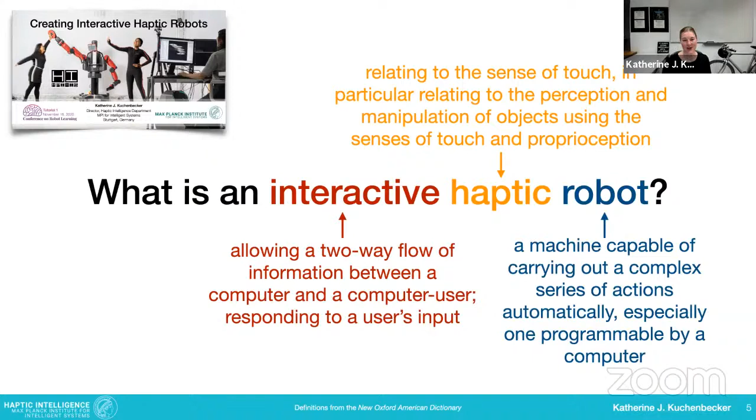Now, to get you motivated, before I try to teach you some of the wisdom that I think might help you create interactive haptic robots, I want to show you some examples, because I know you come from many different fields, especially more learning-focused fields. So just to get you interested, here are four different kinds of haptic robots that my team and I have investigated over the last 18, 20 years.

We'll just go through them in order, showing a few videos for each category. First, in social physical human-robot interaction, the robot is interacting with you like it's another person almost. At the upper left, this is my first PhD student at Penn from the Grasp Lab. He interned at Willow Garage and built this demo, PR2 Props, that lets the PR2 exchange high fives, fist bumps, and fist bump explodes.

And it's doing these by moving through a trajectory and then feeling the contact and reacting. And that tactile reaction was really, really important and amazingly fun.

At the upper right, my now PhD student, then master's thesis student, Alexis Block, turned the PR2 into a hugging machine. And of course, here it is in the default form. Then she made it soft and warm and tactilely reactive. And it can actually give really good hugs. We need more hugs in life these days.

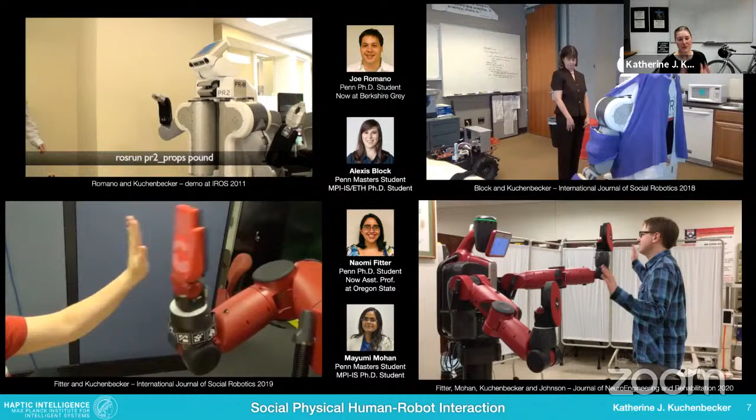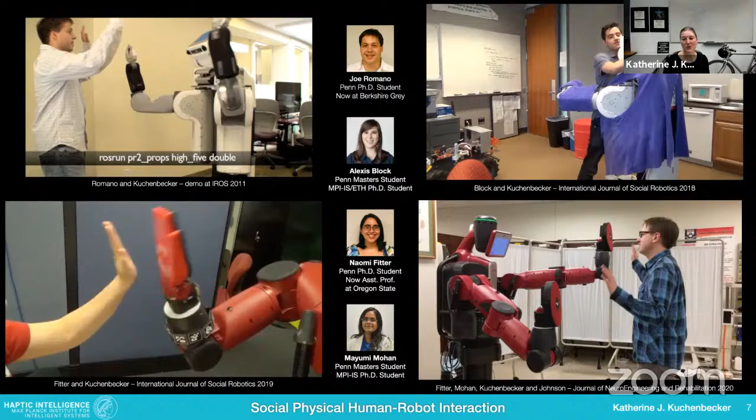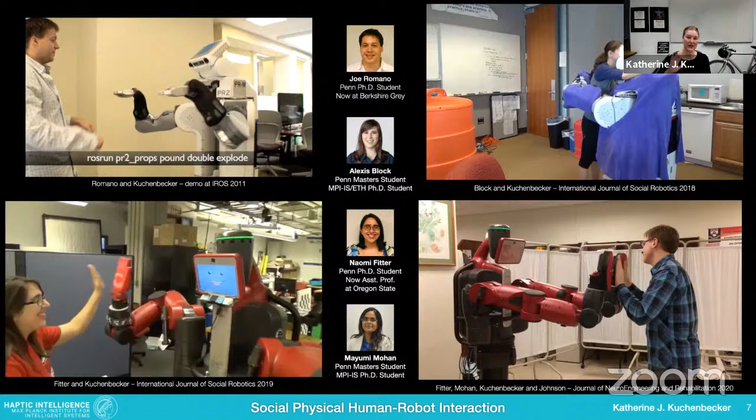Then my PhD student at the time, who's now an assistant professor at Oregon State, Naomi Fitter, worked on rhythmic physical human-robot interaction. It's really fun to exchange hand claps with a robot. We played lots of different games with how the robot would react. And then she turned them, at the bottom right, into a series of 8 exercise games, which we recently published in JNER, to get younger and older adults physically interacting with this embodied agent, often involving contact and stretching and reaching. The boxing one is really fun.

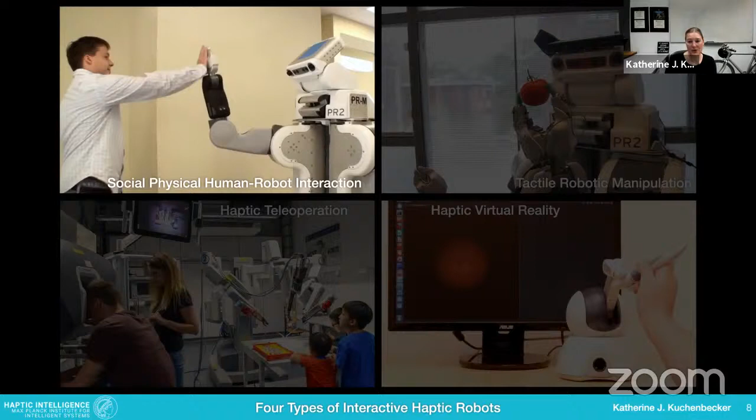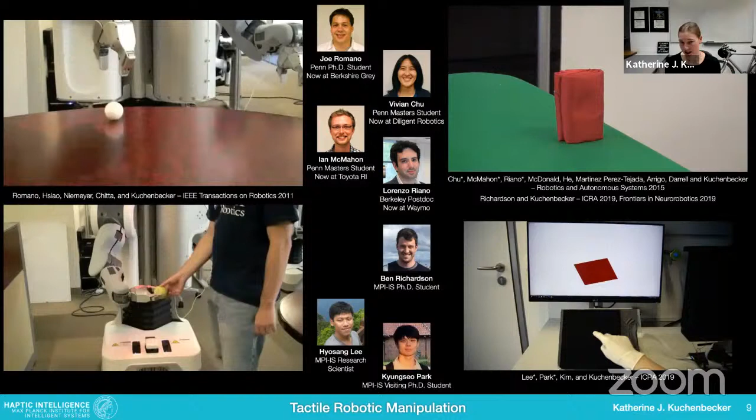Those are some social physical human-robot interaction examples. Now I'm going to move to tactile robotic manipulation. And that is where now, instead of interacting with a human directly, the robot's interacting with things in the world. We saw some examples of this in Antonio Bicchi's keynote right before this morning.

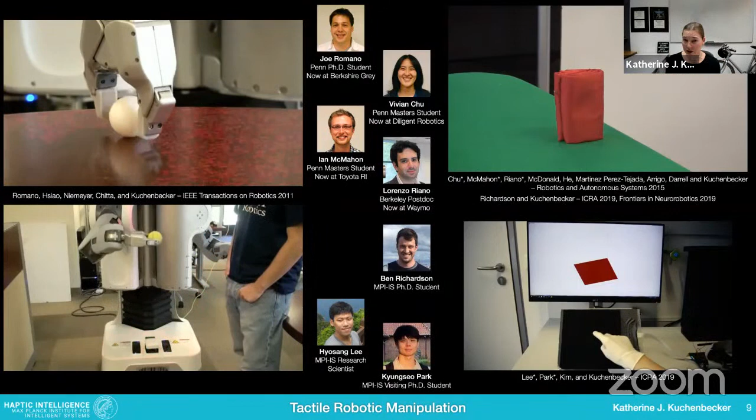This is a long time ago work, also a Transactions on Robotics work, where we use just the native inbuilt tactile sensors in the PR2's hands, which are really primitive, just like 15 little pressure cells and an accelerometer, but we could still grasp and let go of and hand over objects. And then we knew we needed better sensors.

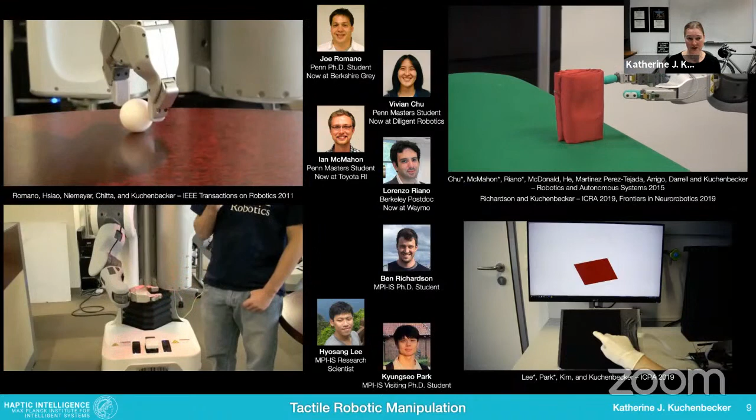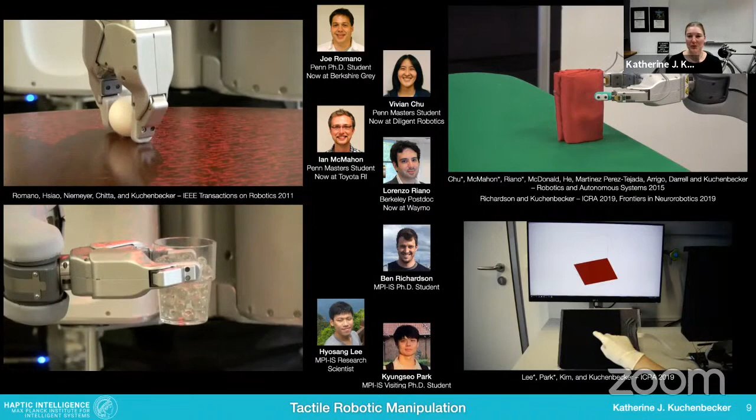So we installed the SynTouch BioTacs, which are biomimetic tactile sensors, in the fingers of our PR2 robot at Penn. And through a project called the DARPA Bolt Project, we taught the robot how to describe objects with words. Now it's painfully slow, but eventually it will grab that object and squeeze it and stroke it. And through simple machine learning, be able to describe it with words like that's smooth and crinkly and compact.

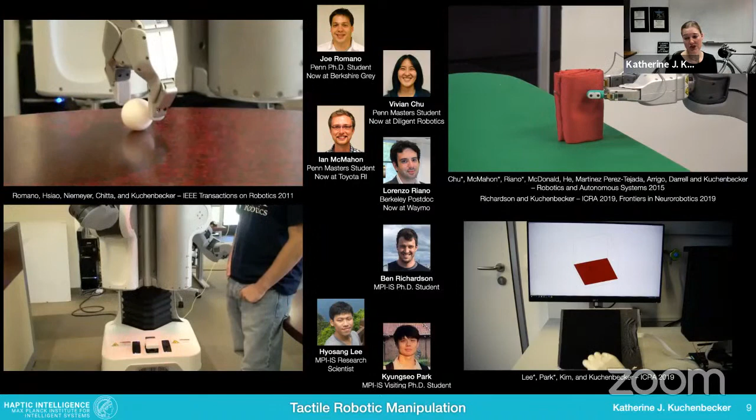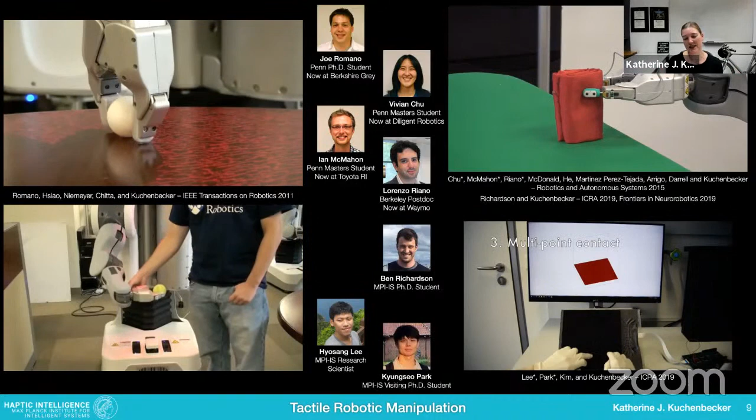And then at the bottom right, just to preview, we're working on a lot of other tactile sensing technologies. This is a flat sensor, so not yet on a robot body, but they can feel pressure at many points across the surface. This work is led by a postdoc, a research scientist in my team, Hyosang Lee. And it works really well, and it's super fast and can feel a lot of contact across a large surface. So that's tactile robotic manipulation.

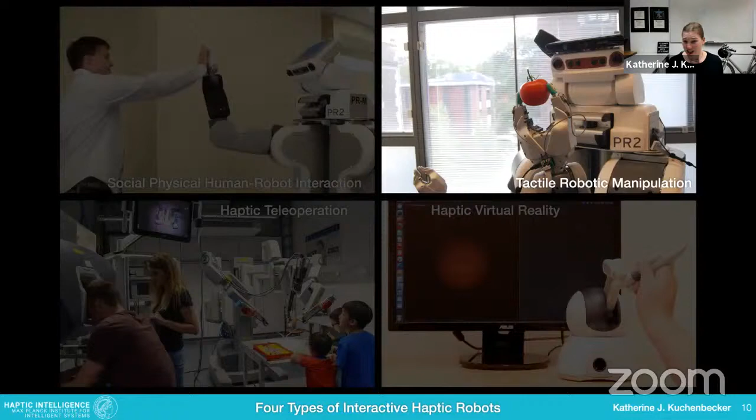Now we get to haptic teleoperation. Here now the human is controlling the robot. So we're not looking at the robot to be very autonomous. We simply wanted to do a task in a remote environment or deep inside a patient. So we did a lot of work on robotic surgery and how to add tactile feedback.

Here we put accelerometers up on the robot arms of a Da Vinci robot, and then we play those vibrations for the surgeon's hands, left and right. This is actually a resident practicing, and they're not very good. We later were able to show that these haptic signals, which we can measure and that the robot can feel, are really indicative of surgical skill and give us a new avenue for training and helping surgeons master eye-hand coordination.

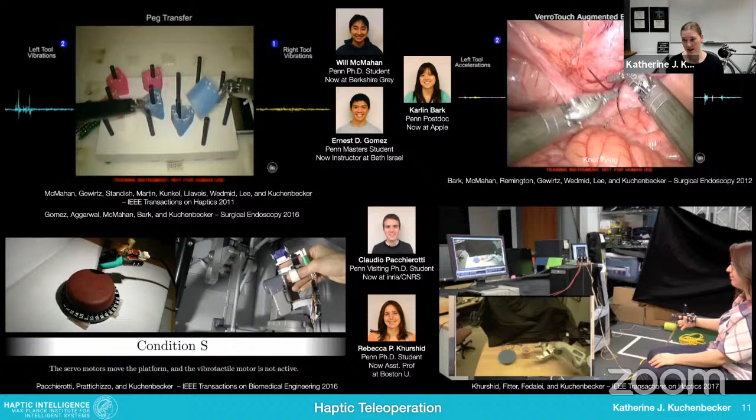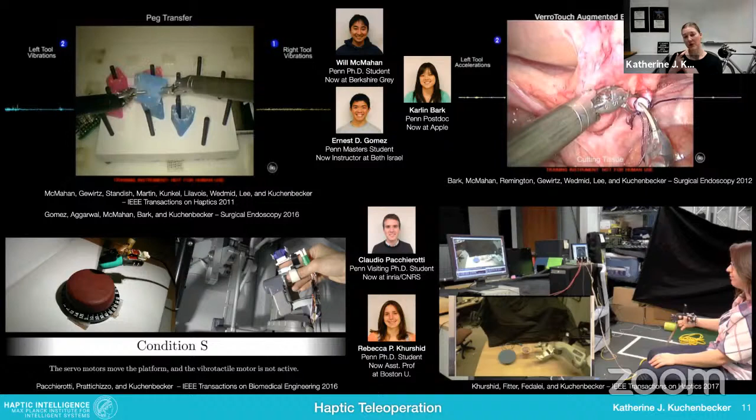We also proved that the technology works in real surgery. This is a pig where a surgeon was using the technology in an animal for the very first time, and we validated we could indeed measure really good haptic signals when there are transients. So when there's making and breaking contact, adding force feedback in such systems is really, really difficult.

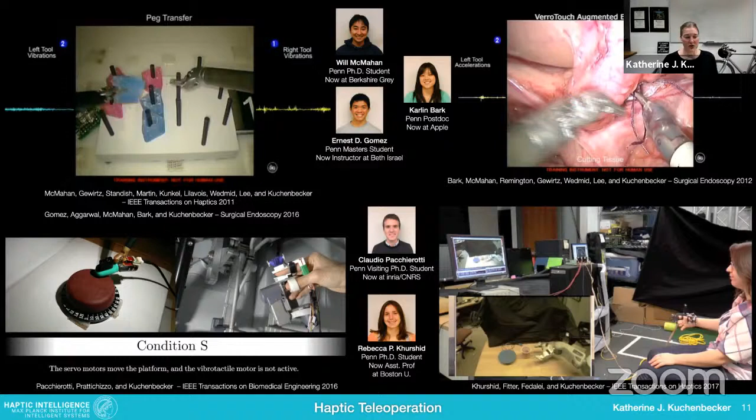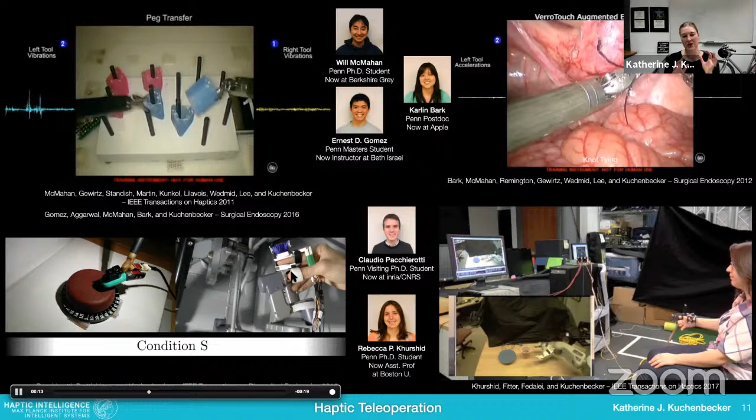We've also worked, as you can see on the lower left, on palpation. So again in surgery, we have a BioTac moving across a soft object that has a rigid stick embedded in it. And you can see the platform under the operator's finger tilting in different directions. We're actually, in real time, mapping the tactile signals that sensor is feeling into actuator commands for the operator, to feel an approximation, like a tangent plane and an indentation, of what the robot's feeling.

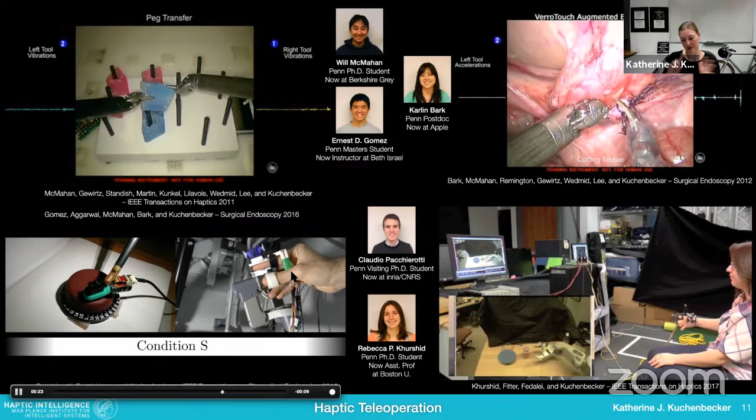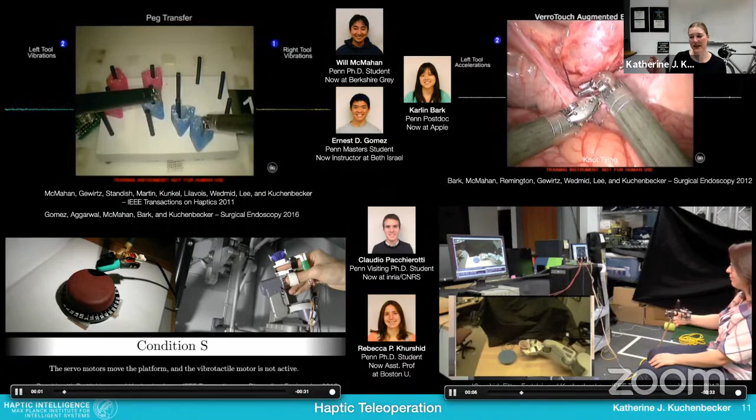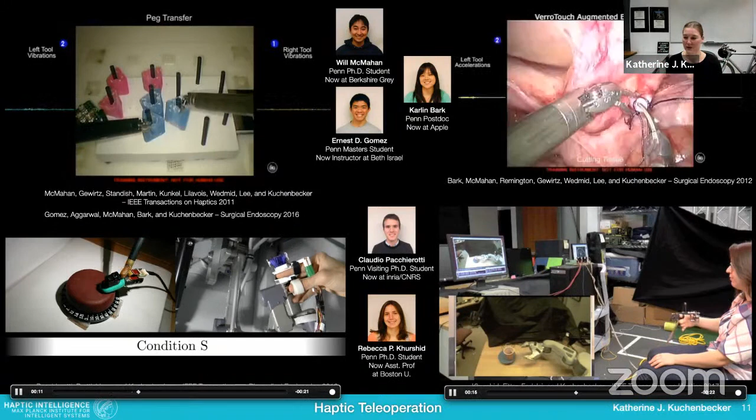And then at the bottom right, Rebecca Khurshid, who's now an assistant professor at Boston University, built a very lightweight wearable device with motion capture that lets you pick up an object through the PR2 and feel making and breaking contact, grasp force, and vibrations. And in all of these scenarios, we've shown the haptic feedback helps people.

So the last of the 4 main categories of interactive haptic robots I wanted to get you excited about is haptic virtual reality. Here, instead of having a remote environment, the user is interacting with some model or trying to get it to make some movement.

At the upper left, this was a fun project. Andrew Stanley and I made some wearable devices that try to guide you, try to tell you which way to go, not through buzzing or vibrations, but actually by tapping on you or stroking your skin. Here you can see me following a trajectory as it tries to make me move my arm.

At the lower left, this is beautiful work done by Heather Culbertson, who was my PhD student and is now an assistant professor at USC. It's called haptography, where we modeled a lot of different surfaces using data and then rendered them through this commercial haptic device, an Omni, which is like a lightweight robot arm you move around. That little copper coil on the handle is a voice coil actuator, similar to what we used in the surgical system, letting the operator feel fine vibrations. We also have hardness and friction, so we can vary how surfaces feel physically and really emulate how they feel.

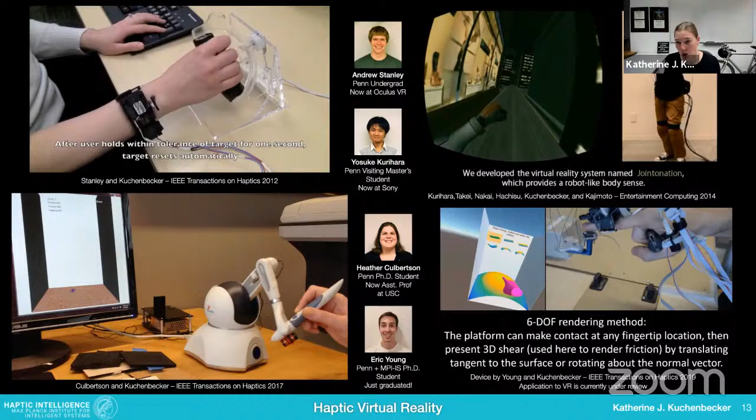At the upper right, this is more of a fun project. We're watching the user's movement, and they have vibration motors on their elbows and knees, letting you feel what it would be like to be a robot for entertainment purposes, so you feel as though your arms were grinding and vibrating like a robot.

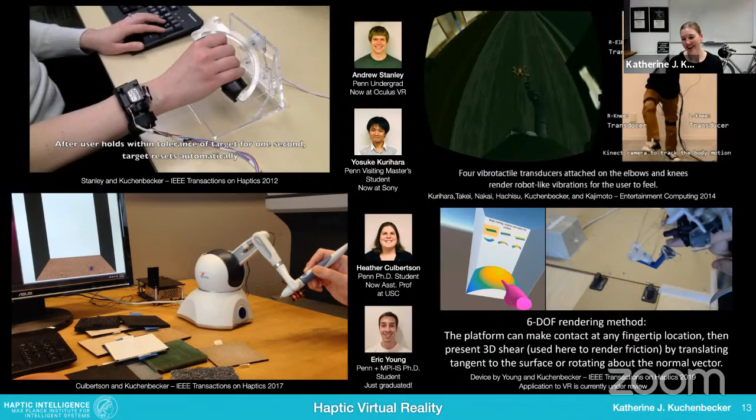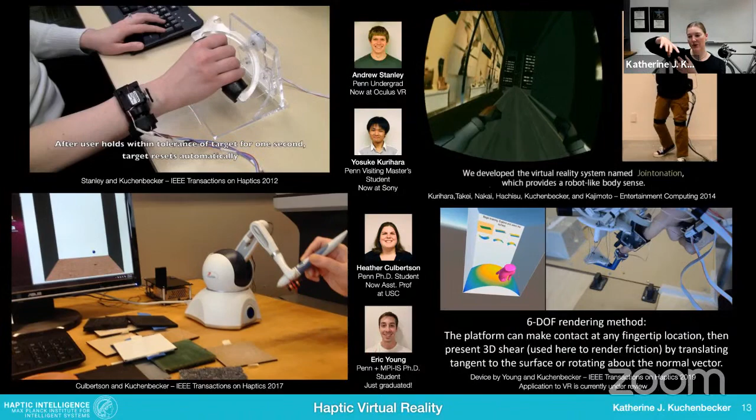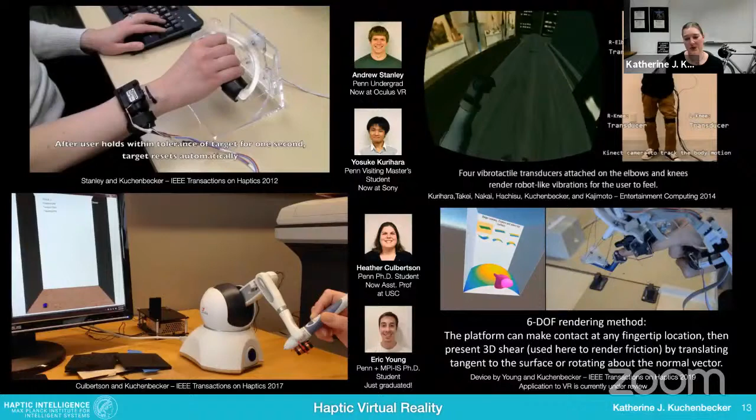The bottom right is work with my PhD student who just defended, Eric Young. He created this amazing device called the Frappeteer that has 8 soft wires that are pushed and pulled to reposition this platform against your finger, making contact at the correct position and angle, and even presenting shear. It's a 6-DOF fingertip haptic feedback device, and you can see it being used there to touch virtual surfaces.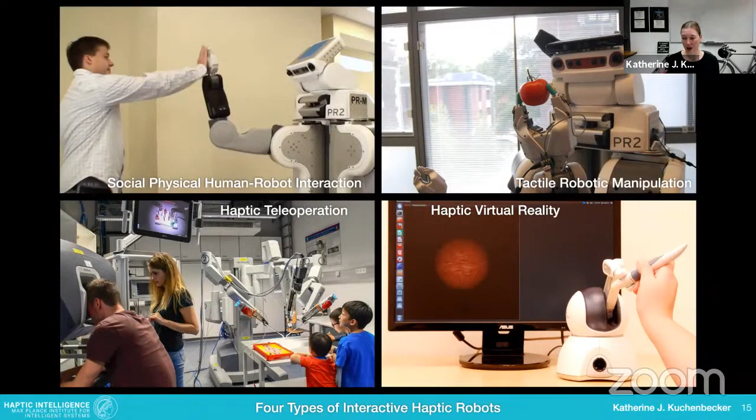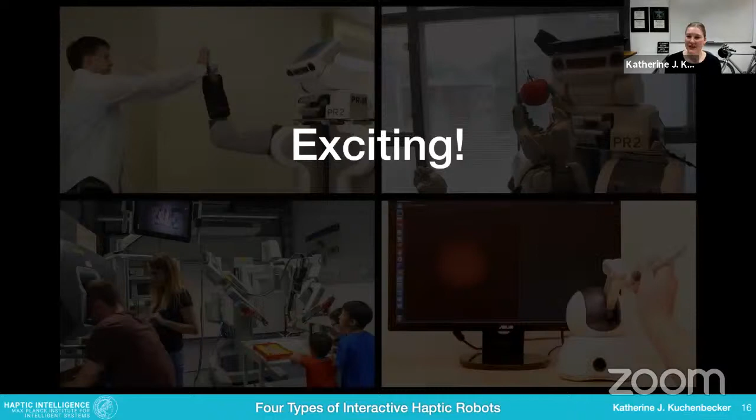So those are some examples of what I mean by interactive haptic robots. I wanted to put this up front to get you interested and excited, thinking those kinds of things could be exciting, fun to play with, and maybe even more importantly, useful. We're looking at many applications in medicine and rehabilitation, in everyday devices, in cell phones, in household robots.

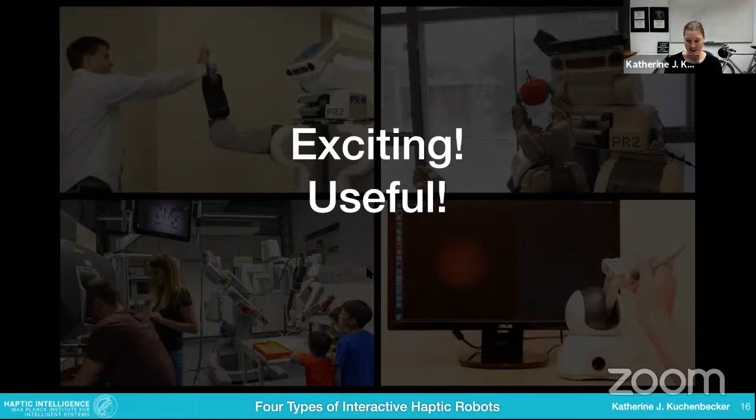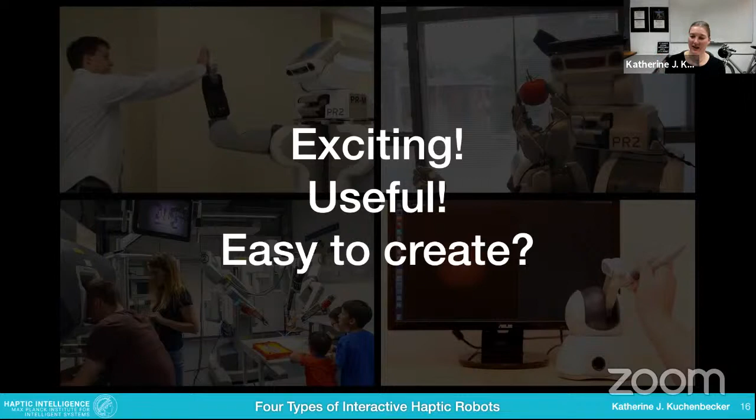The last thing you might think, once I make a video and show it to you, is that it looks really easy, right? Of course the robot's doing that, it's picking that thing up, it's setting it down, the thing is vibrating the way it should, the signals are all happening as they should. But I think it's really not easy to create these things. Creating these interactive haptic robots is really difficult.

It's difficult especially when you're starting, when you're first doing this, and it stays difficult throughout your whole career. You're always trying to assemble new things and do things that have never been done before. You're building one-of-a-kind systems that no one planned, putting this sensor and this actuator and this soft thing and this computational algorithm together, and there are a million ways it can go wrong. It's the human element, the mechanical, electrical, computational components, the physical contact. It's incredibly complex, and that makes it interesting.

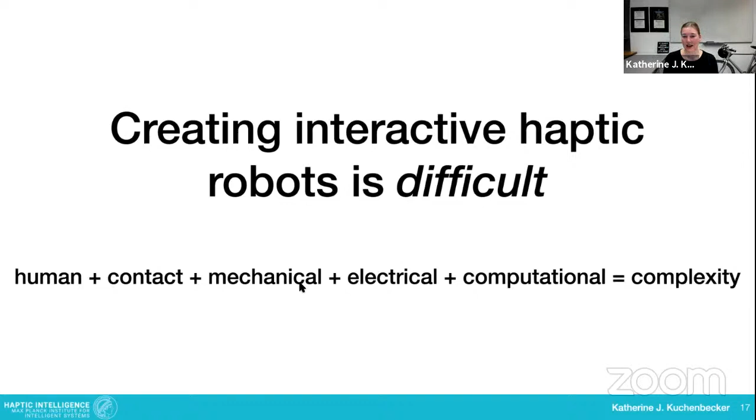I learned a lot of what I'm going to tell you today through my doctoral thesis at Stanford, and later working on haptic interfaces. As I already showed, this is a little lightweight robot, back-drivable, that sits on a table and you hold the end and move it around. You're contacting it, and then you directly feel its mechanics, and then the electrical, the sensors and actuators, all the way into the code.

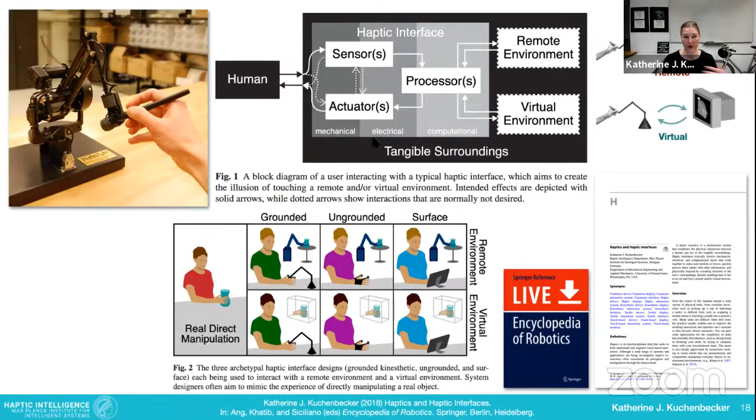There's usually a servo loop running at 1,000 hertz, 1,000 times a second, checking with the remote environment or the virtual environment to calculate what you should feel, and then pushing that back out to you. When it works well, it can feel seamless, and if any one thing isn't working, it can feel quite bad. I think basically haptic interfaces gave me these insights, because when you're using them, you're basically dancing with the robot.

Every little bad aspect of it is immediately perceptible, in this dynamic interchange, whether it's a social agent or a non-social agent. If you're interested in haptic interfaces, you can read this encyclopedia article I wrote a couple years ago in the Springer Encyclopedia of Robotics. There are many other great articles in there I'd recommend, covering different kinds of haptic interfaces. But this isn't what I wanted to teach you about today, since this is a topic only some of you might directly deal with. If you're interested in grounded haptic interfaces, check out Haptipedia, another project in my team where we've canvassed the literature and built a database, a taxonomy of haptic grounded force feedback devices. I'm really excited about this, to help advance research and innovation in haptics.

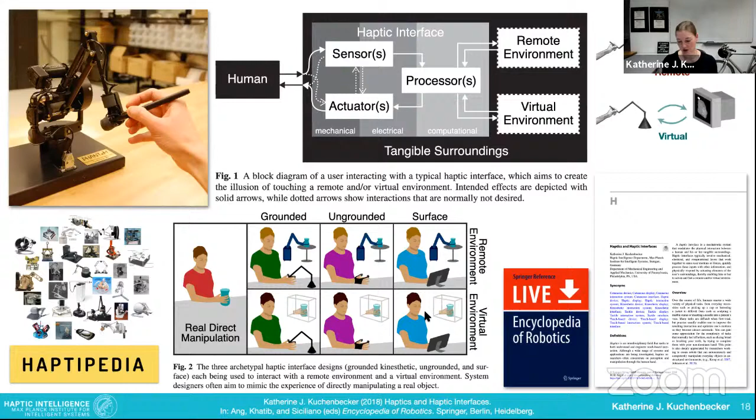Instead of telling you about these kinds of things, I want to try to teach you some more general lessons about creating interactive haptic robots.

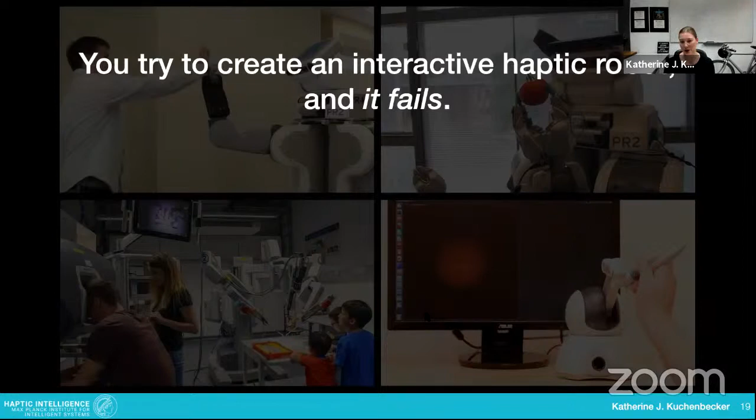That's because I've had many wonderful students, collaborators, and postdocs. You might think, okay, I'm going to create a new system like Katherine's describing, and you'll find out it probably will fail. It probably won't work, or won't work the way you expect. You might then conclude that you're too stupid, that you shouldn't become a roboticist, that you've made a bad career choice, and that you should go get a different job.

This is something Georg Martius really impressed on me when he and I did this debugging research workshop a couple years ago. You should not make that conclusion. That's the wrong inference.

Newly created complex systems basically never work the first time. Every one of these videos I showed you, there were like 100 demonstrations behind the scenes where things sucked, broke, didn't work, and failed. They might have even damaged themselves or just never turned on. There are infinitely many ways for them to fail. And that's frustrating, and that's natural.

There are some techniques you can use to make it easier to make progress and to get really good performing systems. In fact, you need to understand all the interacting elements in order to get the performance you probably want.

Now I hope some of you are interested. And for the others sitting there saying, hey, okay, fine, but I don't want to create interactive haptic robots, I'm working on self-driving cars, or a helper robot for something else, I'm not interested in this.

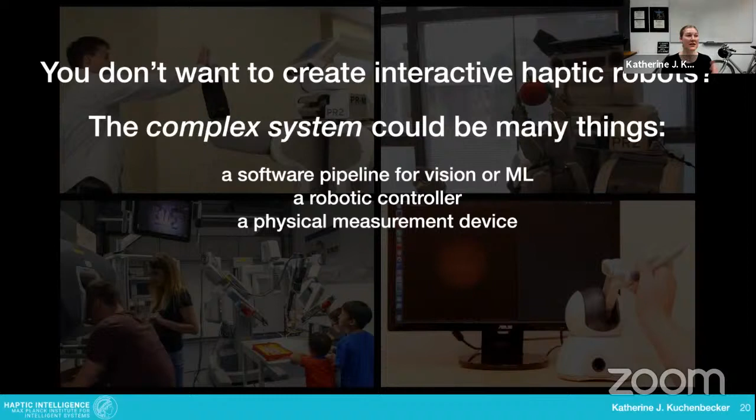I hope I can convince you that the complex systems I'm talking about, most of what I'm going to say today, could be many things. It's not just haptic robots like this. It could be a software pipeline for vision or machine learning, a robot controller, a physical measurement device, a manufacturing process, the files you're trying to compile for your CoRL paper, your own laptop, or a video conferencing system like Zoom. Any of these modern technologies, some with physical components and some without, they always have room for complexity.

I think the kinds of skills I want to share with you, some strategies, would be useful for any of these. So even if you're not interested in haptic robots, maybe I'll still be able to offer you a couple interesting things from my experience.

And then you should be sitting there saying, okay, what can I do? You showed me all these videos, I want to make things like that, or I want to make other cool stuff. Who doesn't? I want to contribute to society, I want to help the world.

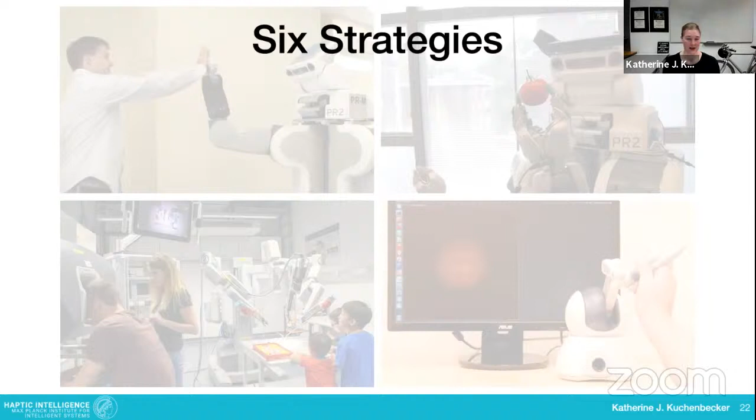So I want to present to you 6 strategies, and I'll go through them quickly: think actively, plot and plot some more, get help, demo broadly, prepare for the unexpected, and be positive. I made these 6 categories by writing tons of little ideas on little cards, then clustering them and arranging them in an order that might make sense to you.

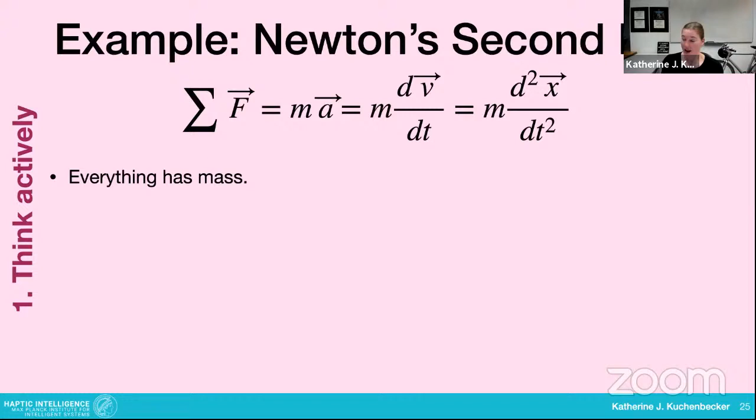Some facts: everything has mass. All robots, all cars, all car parts, all robot parts, they've all got mass. And unfortunately, nothing generates infinite forces. All of our actuators can make large forces, but they can never make infinite forces. So what does Newton's second law tell us?

Well, if the left side of this vector equation is finite, and then I have to double integrate it, well, some things you already know: objects cannot teleport. They cannot change position instantaneously.

Something you might not have fully thought about, the implications of Newton's second law, is that velocity also cannot change instantly. If you're driving down the street going 20 kilometers an hour, or 25 miles an hour, or whatever, you cannot instantaneously speed up to 30 kilometers an hour or slow down. It doesn't happen instantly, it happens gradually.

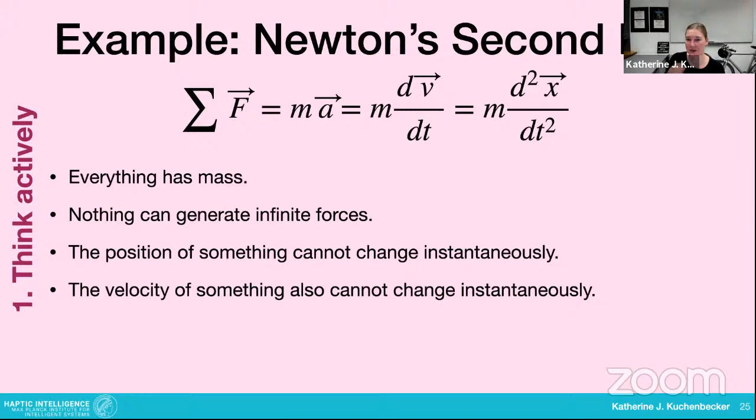And that's part of what makes physical systems tricky to control. You don't have a lot of power; you're controlling the second derivative of the thing you often care about. This law, and many others, hopefully grow in your brain as things you can rely on. That means you should never expect robot motions that defy Newton's second law, certainly not teleportation or step changes in velocity. You should be really suspicious if your sensors seem to report them.

Okay, so let's say you have Newton's second law and lots of other things in your brain, and you're watching your system. You will notice it's doing this weird thing. Maybe it's jiggling in a way it shouldn't, or when you first turn on, your sensors read some weird value and then after a second they come to a normal value, or your hugging robot squeezes the person and doesn't let go, which can happen.

You need to be relentless. This means don't give up. You must fight and seek these weird behaviors and figure out what's causing them. Little anomalies, weird behaviors, things you don't understand, they will come back and bite you later. It always happens. Now, of course, there are some random things that maybe you think aren't important.

At least keep a list of them, like a written list of things I do not yet understand that my system is doing. And plan when you have that mythical free moment, as Max Mintz likes to say, that you will come back and look at them. And when other things start going wrong, look at that list and say, maybe there's some funny interaction, because any aspect of something you don't understand in your system is an indication that there's room for some error or problem or behavior that you can't control or explain as a scientist, as an engineer.

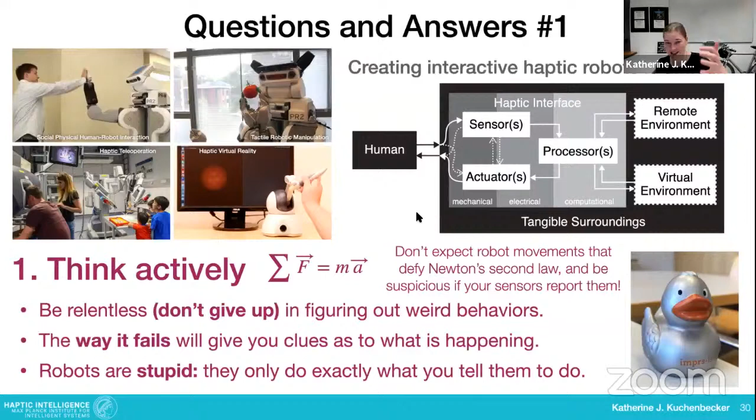Okay, so that was my first of 6 strategies. Number 2 is plot. I love plotting. So talking to the duck couldn't solve your problem, what do you do? Looking only at the output — like where your self-driving car drove, or how the hand grabbed the object, or what classification results you got — it's hard to tell what's happening when you're only looking at the end result. Correcting some subtle problems inside can enable major improvements in your overall system performance. So when your system's not working quite the way you want it to, you need to gather as much information as you can so you can diagnose and fix it. I think plotting is really important. Alexis Block says, plot everything. Maybe not absolutely everything, but you can plot a lot of stuff and understand it.

Why does plotting matter? I don't like plots. You do, actually, you just don't know it. Visualization is incredibly powerful. Humans have a brilliant system for interpreting visual input, and I know all you computer vision people know what I'm talking about, so you should let your brain work for you.

Felix Wichmann is a professor at the University of Tübingen who studies visual neuroscience. I heard him give a talk a few years ago, and he said we have a majestic instrument for visual perception. I like this phrase, majestic instrument, so we should use it.

Of course, when your system is running, you can also display things in real time, but as a human, it's hard to watch everything and really understand. And sometimes that very act of displaying slows your system down. So you may think, okay, I'm going to printf the joint angle 1,000 times a second. That printf will prevent your code from executing 1,000 times a second. So in the sensing and displaying and debugging, you don't want to be disturbing the very real-time process that you're trying to observe.

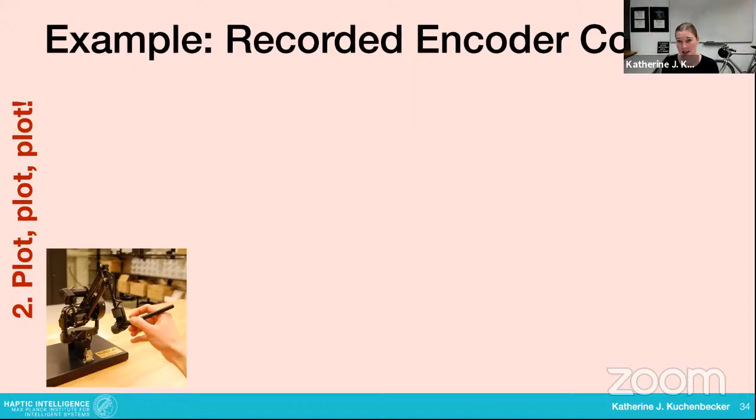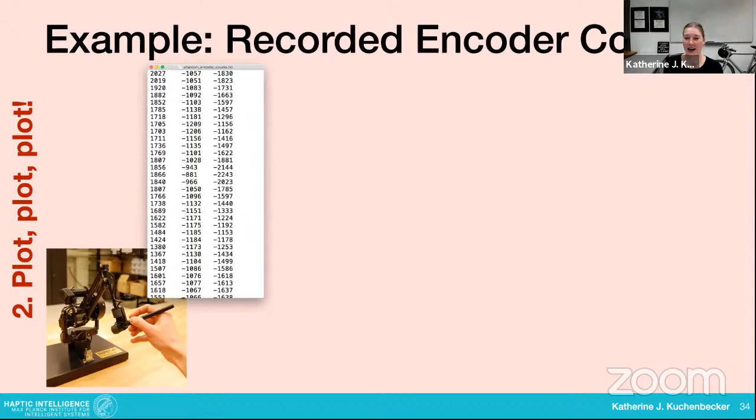Here again is that phantom haptic device. This was for a homework assignment in the robotics class I used to teach at Penn in the Grasp Lab. I just moved the tool through a bunch of locations, clicked the button, and saved these encoder counts. If you look at the first column, the numbers are going down—plot them. The blue one is the first column. You see it has a downward trend, and the other two are kind of oscillating around their values.

These are over time. I wrote a word. Can anyone tell me what the word is just from looking at the signals over time? No one can, I don't think. It was the word 'phantom.'

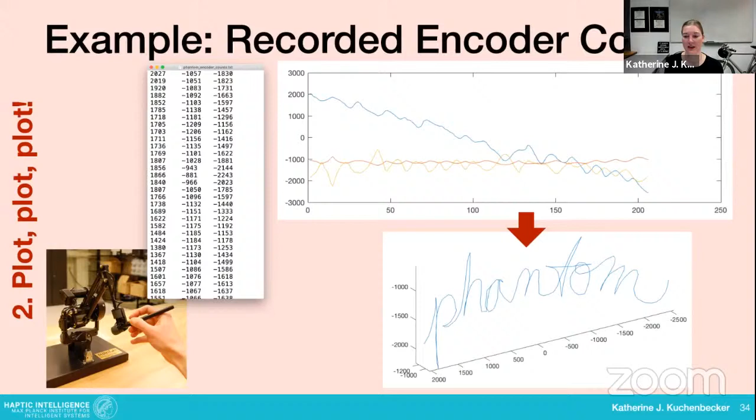This is now the encoder counts, and it's curved because it's in joint space, not in the end effector Cartesian space, but you can still read the word because locally it's approximately a linear transformation, and you can quickly see what's happening. So plotting signals against one another—wow, that's something I could perceive in 3D space, and I can immediately make sense of it.

I didn't put axis labels—they're in encoder counts—but these aren't figures for a paper, they're just debugging. You don't have to always be so proper. If you're going to show them to someone else, maybe you put some labels on them.

What kinds of plots can you make? There are so many kinds. Gather data when your system is misbehaving, doing the thing you don't want it to do. Plot the values over time, variables versus other variables, like I just showed you, looking at internal states versus other states or variables.

You can create histograms, and you can also use a third dimension. I just showed you 2D plots. You can allow rotation, animation over time, or color to really try to pack a lot of information into these visualizations.

I'll give you a little case study. This is actually from when I was a postdoc with Allison Okamura at Johns Hopkins. We thought that prosthetic devices should give proprioceptive feedback, but we didn't yet have good prosthesis devices—we didn't have any way to provide it. So we created a model system where the person kind of thinks they're moving their own finger around, but we put a geared DC motor.

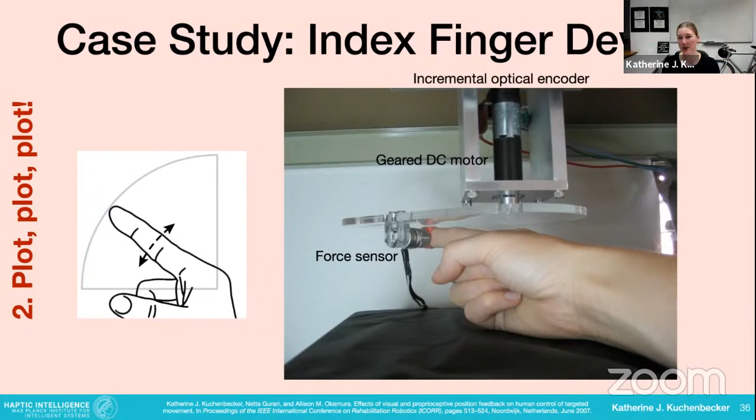So this is like a very high control authority motor that can really drive your finger wherever it wants. And then a force sensor, so we can measure the force and control the dynamics between the force you exert and the movement we allow you to feel. So we could simulate lots of different kinds of prosthetic fingers, basically.

So I programmed a controller, a PD controller, where I knew the trajectory—the theta and the omega, the angular velocity—that I wanted the user's finger to undergo as a function of the force they had been exerting. And I was testing my system. I thought, oh, this is really great.

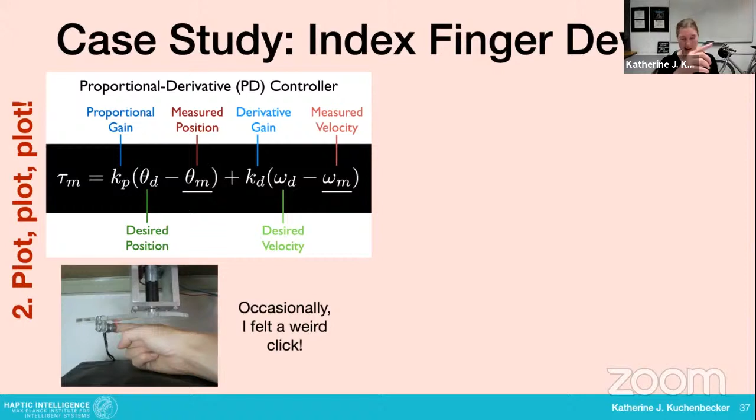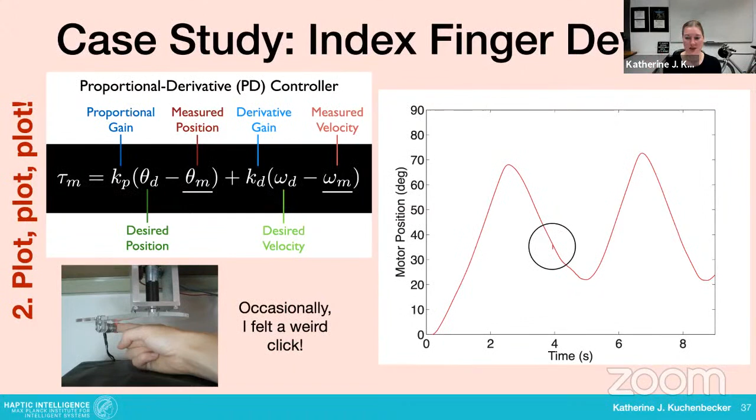And all of a sudden, I started noticing I feel this weird click—like every once in a while my finger moves. What is that? That's really strange. So I recorded some data. I caught it on the first test. You see here at 4 seconds there's this little glitch. So what do you do? You zoom in on it. And there's this data point that's out of line.

Now remember Newton's second law. This thing has mass, it doesn't teleport and teleport back. So there's some problem, some weird thing going on. And I didn't want this thing to keep doing this, so I said, okay, how can I figure this out?

You start paying attention to the clues, the way it's failing. So I measured the distance from the angle, the error, and found it was 1.8 degrees, and it was consistently 1.8 degrees. Why is my data, I'm getting these values 1,000 times a second, and every once in a while, boom, 1.8 degrees wrong, and then it comes back?

That's weird. So I did some math, and I looked at my encoder, and I figured out that it was exactly 256 counts on my encoder, 2 to the 8th. So one bit of the encoder count was just randomly flipping from 0 to 1. It turned out this was a known issue with the board we were using. This is not something I programmed wrong, this was a known error, but I could fix it in software. And once I did that, the data points came right in line like we would expect, no teleportation, and I could carry on with my experiment.

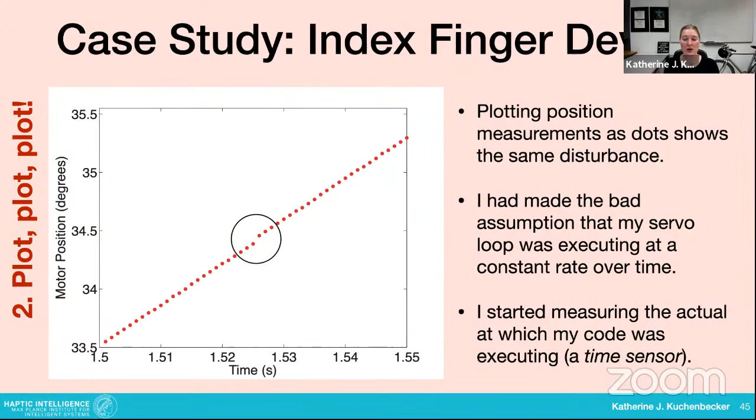So what I did was I added what I'd call a time sensor. I started querying the processor clock when I sample my sensors. So I have my position sensor, a force sensor, and a time sensor, like how much time has really passed since the last time my code ran. It was supposed to run 1,000 times a second, so 1 millisecond. You see on average it was a little less, and then periodically, very systematically, something from Windows was interrupting it and taking about twice the amount of time it was supposed to.

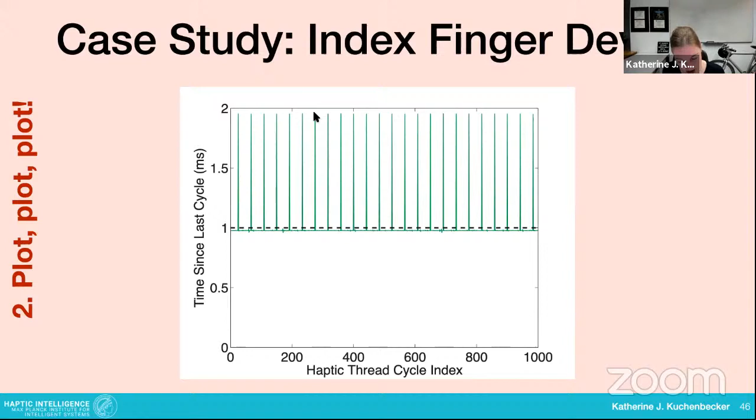But I was blithely assuming only 1 millisecond had passed and divided my change in position over change in time by a constant, which was a bad decision. So if this was my old data, once I use the correct real time instead of assumed time, the plot becomes physical and nice and real and beautiful.

I went a long time without any data, but that's fine. I don't need to have a sampling rate that's exactly even.

So I would say, did we solve the mystery? I would say yes, we did. This velocity looks really good to me. And actually, I hadn't noticed it, but after I got rid of the clicks, these were causing little vibrations that I could feel. When I did this, there were no more vibrations. Just a few more plotting tips.

Be careful of filtering signals, whether it's over time or space. It's powerful, but take a look at the original signal. Just don't filter - it's like salting your food before you taste it. There's not a one size fits all. You should really look at what is there. Noise is in the eye of the beholder. So take a look at what you're handling and what happens.

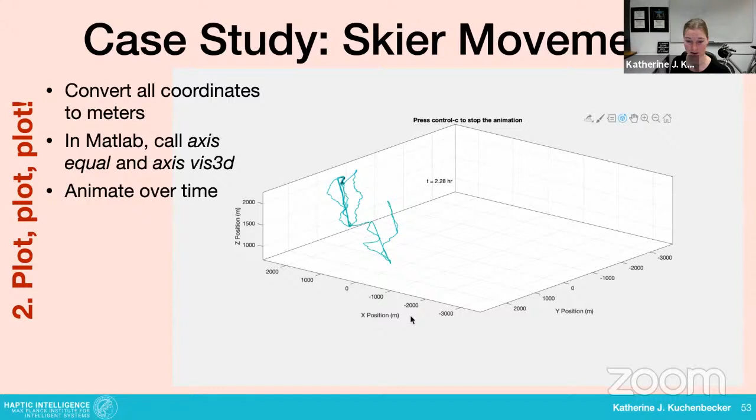So now you can see this day that Jonathan and I spent skiing in Whistler Blackcomb. He's the little black dot, you can see him riding. That was a really good lift, apparently. I think we stopped for lunch. And then he's coming over. And then here, oh, that's the gondola ride.

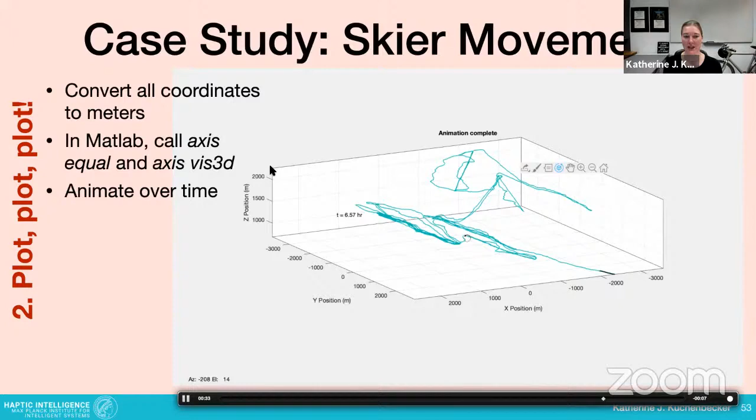And I want you to notice how much better you can appreciate the movement that was observed by watching it over time and in 3D. That's the end of the day skiing down to the bottom of the mountain, and you can really see the structure and the shape. It stays at a constant scale. If this was interesting to you, you could probably much better analyze the movement that happened by treating it this way. So that's my second module.

This was plot, plot, plot. And I put a summary here, but would be happy to hear any questions, comments that you might have. I think we can use one question from the previous.

So Benjamin Bohr, so you're talking about debugging, right? But in a way, you get using your intuition about debugging. But there are some other people, like they come from formal methods, and I think Benjamin is one of them, so I'll just ask his question. So, have formal reliability and systems engineering techniques commonly used in aerospace crossed your desk? I suppose you're assuming he's asking, can we do formal verification of this system, automatic tools for software verification? Can you use this type of technique to achieve the same goal as you're suggesting to do manually?

Yeah, Benjamin, thank you for the nice question. And of course, I'm limited in what I know about, and I'm getting old, so there are wonderful tools out there, but I have two kinds of responses. So why I think those kinds of very formal tools don't often work so well in robotics: we are building new systems, they've never been built before. And so going to the effort of having a formal verification system really early in development, I think doesn't make sense. So we can learn elements, we can take elements like unit tests or things like that.

Thank you, Katherine. I think Manuel is - yeah, sorry, oh okay, there was a small problem with the connection. No worries. I lost a minute, so if someone can cover for me. No worries, let me just thank you, Katherine - that was a wonderful talk and tutorial, and really a lot of wisdom and very insightful suggestions for researchers in the broad area of robot learning, and then in the particular experiences you've had with haptics. So thank you very much. My pleasure, thanks again for having me. Hopefully some of it might be useful to someone. Take care, thank you.